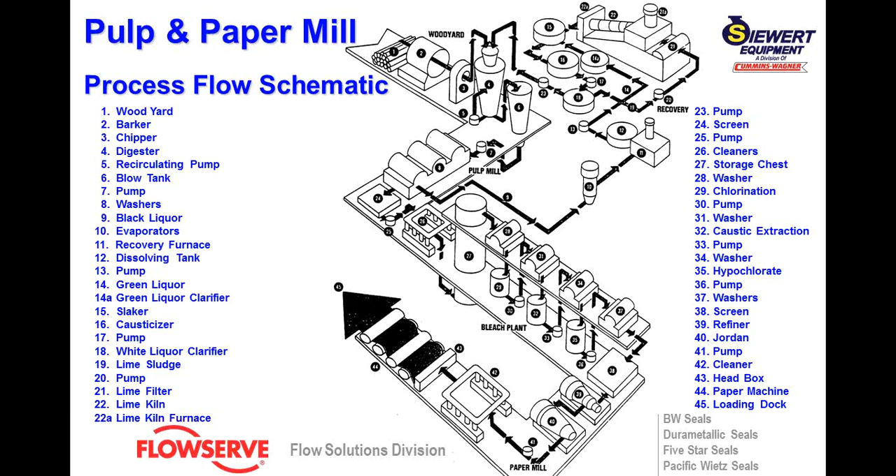Now, system overview, we're going to talk about the fiber sources. Fibers which can be used in the paper making process: wood fibers from trees, recycled bags, rags, vegetable fibers, mineral fibers, and even synthetic fibers.

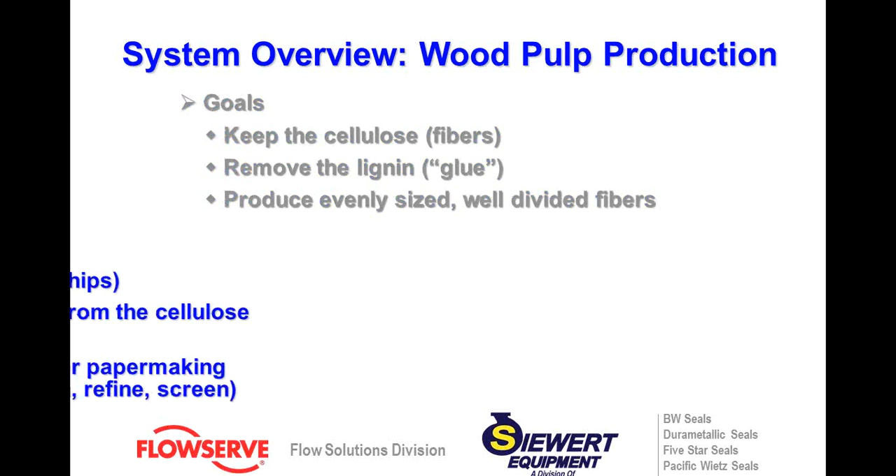The goals of a wood pulp production facility: one, we want to keep the cellulose fibers; we want to remove the lignins; and we want to produce evenly sized, well-divided fibers. There are three basic steps: we need to prepare the wood, separate the lignins from the cellulose, and prepare the fibers for paper making. Wash, clean, bleach, refine, screen.

Now, in this process, again, this is a gross overview of the process itself, but whatever plant you're working at, you want to talk with your process engineers to show you the whole process so you can get a good idea about how everything fits together. We're going to talk about the seals used in your industry specifically.

First, there is the general service seals. This is the ISC II standard pusher seal. These are standard, made to specific ANSI standards, so that they're readily available. They're stocked, they're generic sizes, and turnaround times are very, very quick for these types of seals.

You can see a single pusher seal in the top left-hand corner, and just below it is a dual version of the ISC II. Both are used in the pulp and paper industry. There are quite a few applications that can set up - there's tarring, and especially with some of the black liquor products, you need to have dual seals to be able to keep the stuff from setting up around the seal. We'll go into that further with the different processes. But this is the standard general mechanical seal that's used in most general applications, and especially your ANSI pumps.

The BX bellows seals. Now, the BX seals are used where you have places where you'd have polymerizing or crystallizing types of processes, things that would harden and set up around or hang up a dynamic O-ring. From some of the previous webinars that I've hosted, I've talked about the different seal designs like pusher seals and bellows seals. Well, the pusher seal, if you recall, has a dynamic O-ring which can hang up. The bellows seals do not. The bellows doesn't allow - since you have a bellows, there's no contacting surface to the actual sleeve or shaft of your pump, so nothing can hang up.

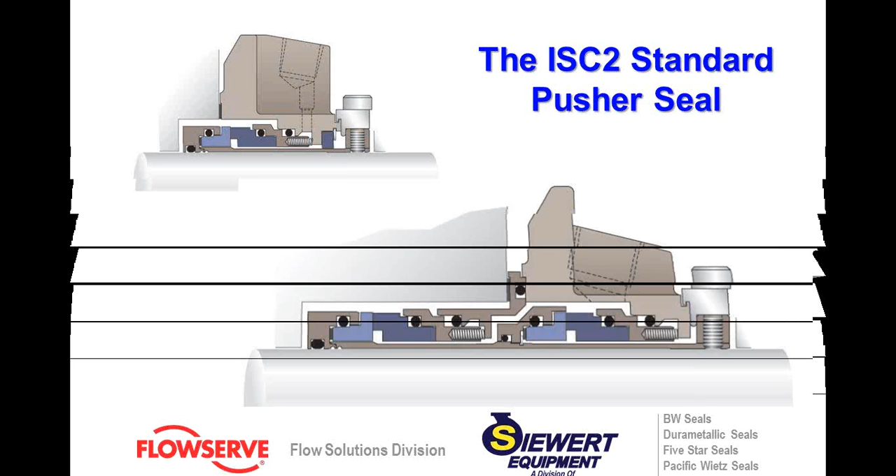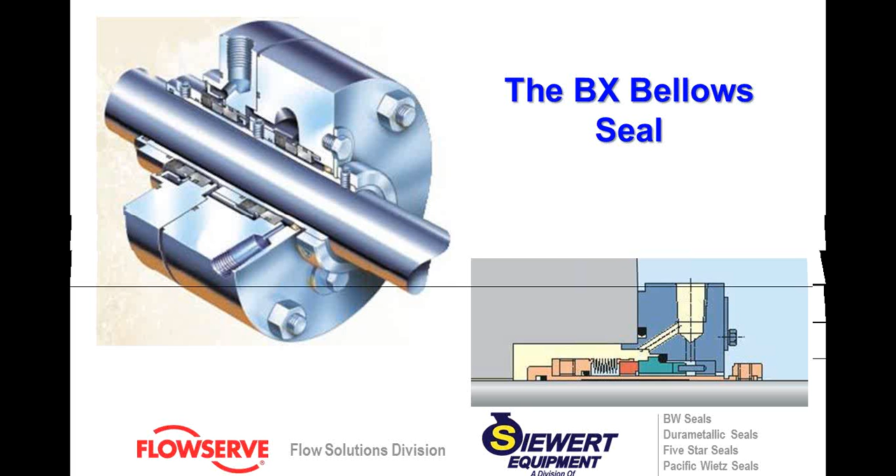Other types of seals here are the SLM and the SLC. Now, these are slurry style seals, and if you can see from the different cutaways in front of you, you'll notice in the top left - and I think you can see my cursor on this seal itself - if you'll notice the green, that's the stationary face, and the red, that's the rotating face. You'll notice how they're what they call end facing. That means that where those two seals meet, it's at the farthest most point, and there's no recessed step in the seal faces themselves. Some of them will have a wear nose.

This does not. The reason there's no wear nose is because in slurries, you want to be able to expel debris and solids away from the seal faces, and that's why the seal is set up the way it is. It's set up end facing and outer rotation, so that everything that can come in contact with the seal faces is thrown away.

And that's basically the big factor with a slurry style seal. Other factors you can see, the springs are actually outboard, designed very similar to the ISC2. The ISC2 utilizes this design. It's a very successful design for keeping springs out of dirty surfaces. It's also very robust. Your slurry seals are generally thicker, heavier material, very durable seals. Thick O-ring grooves, thick O-rings. They're meant to be abused.

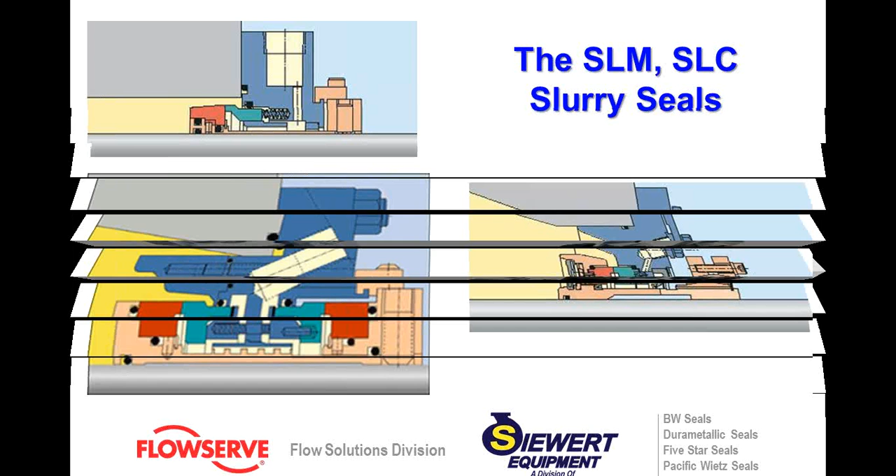The MSS is a mixer seal, a split seal. Not quite as unitized as the split seal, but again, in big large vessels, it's going to be rather time consuming to disassemble and put a seal on, or when you want to get away from the leakages of packing and gain the added efficiency of a mechanical seal, they make the MSS split seal.

In your boiler house, in the steam generation center, you'll have a lot of boiler feed applications. Some facilities have very small boiler feed pumps, some of them have rather large boiler feed pumps. Some of the better designed mechanical seals here that Flowserve developed was called the QBU seal and the D Seal. The D Seal has been around for years. The D Seal is a single spring, very, very wide mechanical seal. The mechanical seal faces are very wide. It is a very, very tough, long-running, high-heat mechanical seal designed for boiler feed applications. It can take a lot of abuse.

Now we're going to talk about the sealing applications, where all those mechanical seals that I just talked about, we're going to show you where these seals fit into your process.

Okay, sealing black liquor. Weak to medium black liquor, that's 12 to 50% concentrate. We prefer dual seals with pressurized barrier systems, so the 53s, or even a 54, to prevent the liquor from setting up between the inboard faces.

Again, this is what I was talking about with some of the bellows designs. If you're running single seals in situations like this and the black liquor sets up, when you go to restart the pump, the faces are stuck together, components are frozen up, and you won't have a seal for very long. The ISC2 or double BX seals are preferred in these types of applications. You want to make sure you're using an AFLAS type O-ring or an EPR O-ring for your gaskets and elastomers. Vitons and Buna and any types of caustic services do not work well.

So you want to remember, in the pulp and paper industry, a lot of the defaults here are AFLAS and EPR. There are other generic names for these types of O-rings, but EPDM is another variation of the EPR O-ring.

Single seals with hard faces and steam quenches have been used. So basically, like a bellows, single bellows seal, especially if it's a small envelope where the pump can actually fit it inside. You can run a bellows seal with a steam quench. You have plenty of steam available in a pulp plant.

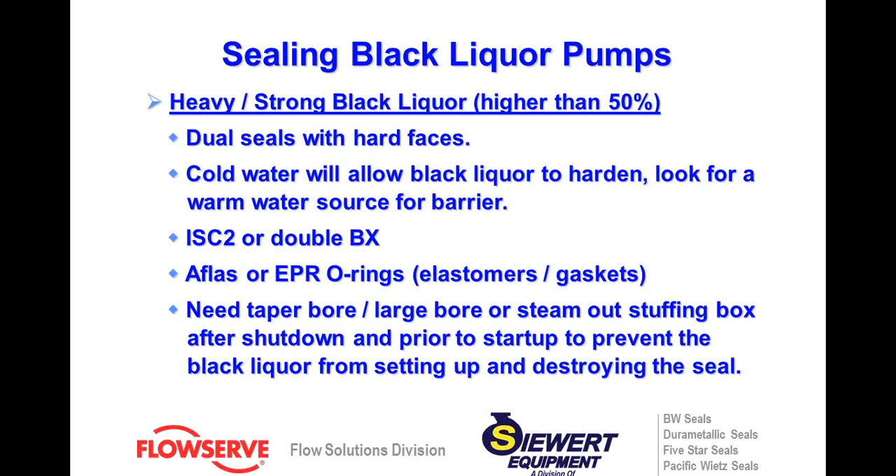Pressurized water barrier is typical. Single cartridge BX seals have been used with external seal flushes on this. This stuff can get very abrasive, and that's where slurry seals come in - the SLM and SLC seals we talked about, with very robust end-facing mechanical seal designs. They've worked very well in these types of applications.

Sealing white liquor: lime is added to the green liquor to form white liquor. Prior to the clarifier, the white liquor is very abrasive, requiring hard faces on dual seals, or the use of a single seal with a throat bushing and external flush into the stuffing boxes. That requires a water source to keep the mechanical seal flushed with a Plan 32. You're bringing water into your process, so that's something you have to manage.

Abrasives are very hard on mechanical seals. Certain types will hold up in certain fashions. With typical mechanical seals that have standard configurations - some of the lower-end seals with springs on the rotating sleeve inside the process - when dealing with abrasives, dirt and particulates build up inside the springs and eventually plug it off and hang up. Other lower quality seals, if the metallurgy or metal quality isn't great, the abrasives will literally eat the seal apart, and within a short period of time you'll have a failure, pull it out, and it's completely shot and wasted.

The most unique case I saw had abrasives that were quartz in a flour consistency, less than 5 microns fine - like a powder mixed in with a viscous fluid. Even in a Plan 13 configuration, flushing from the mechanical seal back to the suction process, which generally helps with dirty services, it would still erode the seal gland in about 6 months, at shaft speeds of around 3,600 RPM. Very interesting to see, but remember bellows are thin and can erode away.

This is where the SLM really can shine, and these seals take it. The SLM, for instance, can handle abrasives up into the 40% range, I believe as an upper limit, and it will work just fine. SLM seals and slurry seals work with any type of heavy abrasive surface - this is when you want to start looking at them. They're heavier and don't fit in every configuration; they were designed specifically for slurry-style pumps.

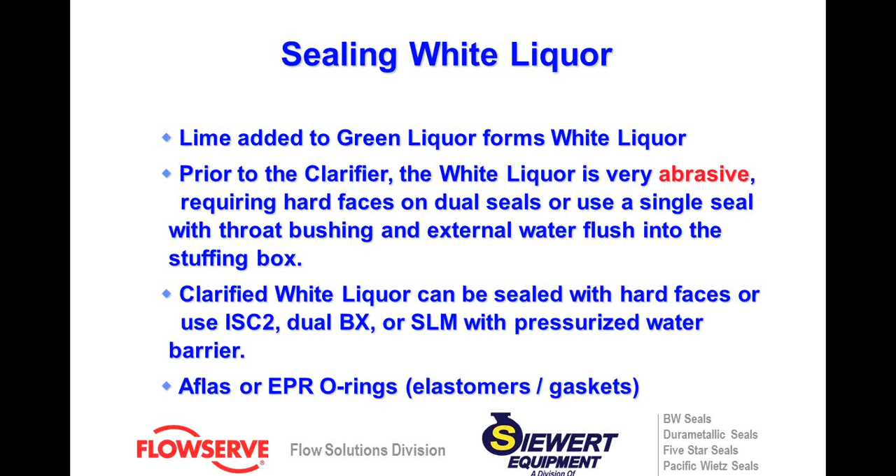Once again, your elastomers are AFLAS and EPR. Now, the bleach plant. As you know, your bleaches are chlorine, chlorine dioxide, sodium hypochlorite. If you look at any metallurgical chart for these applications,

basically there are two things that can be used on these surfaces, and that's titanium or Hastelloy. I don't even think Monel or duplex stainless steels will pass muster. I'm almost positive that stainless steel won't pass muster in chlorine service because the chlorine directly attacks it. So with the wetted parts, you're looking at fairly expensive mechanical seals. You want to make sure you've got everything right, and that there's nothing wrong in the material selection when buying a mechanical seal. You want silicon carbide versus silicon carbide inboard faces—a hard face combination.

You also want to make sure you're using dual seals in these types of applications. But again, because the chlorine, once it gets to the outside, it kind of salts up and leaves a residue, so you have to manage that as well. And it's caustic—if it gets on anything, you don't want anybody to breathe it.

It can make someone sick. Again, on the elastomers, you're pretty much limited to the Kalrez family or Chemraz—Kalrez is a DuPont product and Chemraz is a Greene Tweed product. These elastomers are basically competitive brands, and they make an O-ring that can pretty much take any type of chemical environment you throw at it and withstand it.

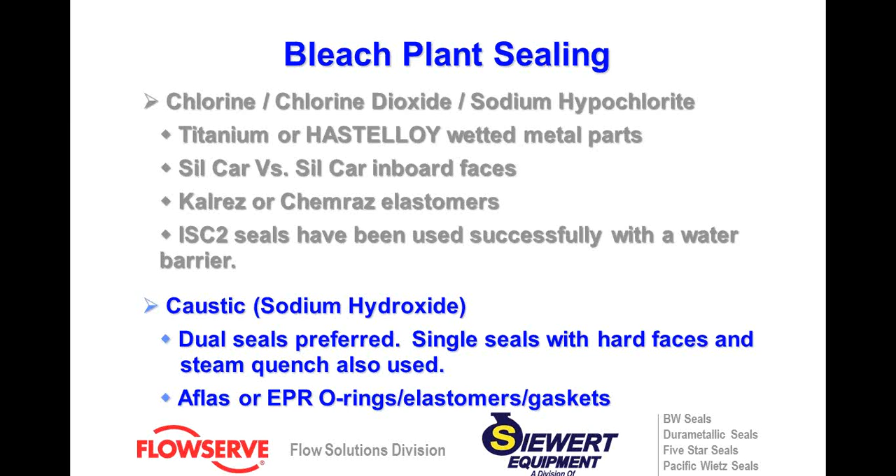Okay, sealing additives and agents. These coatings and filler pigments can be abrasive, so you want to make sure you're using slurry seals—like I was talking about, the SLC and the SLM.

Starches, resins, and dyes—dual seals with a pressurized water barrier are preferred. Sizing agents and other additives, depending on the chemical, typically also use dual seals with pressurized water barrier systems.

In some of these applications you may not see these seals used—you may actually be using packing in certain, more abrasive areas instead. What we're suggesting is that if you want the most reliable, robust system, we'd recommend these dual seals—that's where we're coming from. We want to increase your reliability and avoid downtime. Unlike refineries and chemical plants, which have lots of spared equipment, I've found that most pulp and paper plants don't have spared equipment.

And of course, sealing the paper stock, the chest vessels and agitators - again here the MSS, that's the split mechanical seal. The PSS III, which is a split, or the MSS is a split mixer seal. The PSS III is a split mechanical seal. Can be used on both pumps and in certain

mixer arrangements, especially if it's wetted with a side entry. They can also be, again, you want to have small volumes of flush water in the pulp in the paper stock pumps. Of course, with the larger sizes, you could use the PSS III Split Seal if it requires a lot of time to take the pump down and disassemble it to replace the seal.

Again, if time is of the essence, a split seal can be put in fairly quickly, as opposed to disassembling the whole pump and putting a brand new cartridge seal in. If you do have spares, of course, an ISC2 mechanical seal is an excellent choice in some of the more general services, if configured correctly.

Again, you want to make sure you have small amounts of flush water to keep the paper stock away. The paper stock can get - it dries out, it draws water out. So when it dries, it starts to get very abrasive, especially in the stuffing box.

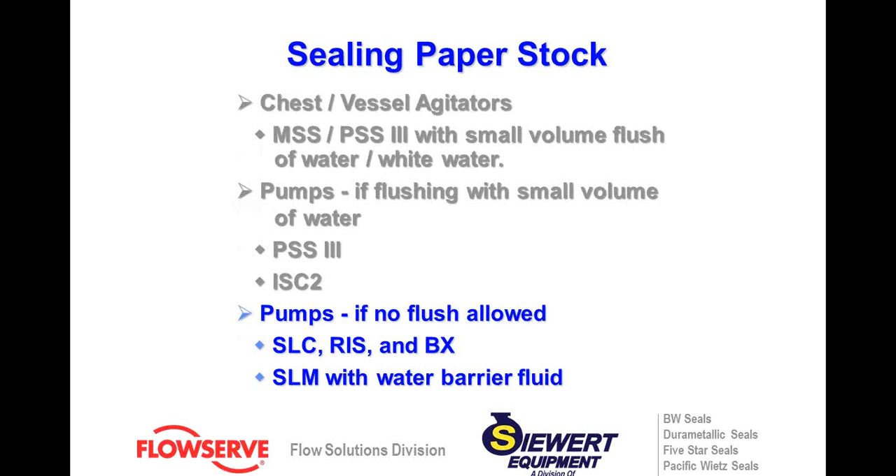I've actually heard of the anomaly of someone saying, nope, I've gotten years out of it and I don't do anything, and it's pushing hot water at this temperature. Now, there might be pressure differentials. The pressure gradient might be good enough in your stuffing box to where you're not flashing. If that's the case, you might actually have enough of a fluid film. Also, if it's running and you're not seeing any leakage, that doesn't mean it's not leaking. Whatever's coming off might actually be off-gassing and steaming itself away. But again, I'd say 90% of the time, if you don't have a properly set up mechanical seal in a hot water service, it's probably not going to last you that long.

Again, the general service pumps, the ANSI pumps, any of this, under 300 psi, under 300 degrees Fahrenheit - these are where your ISC2 seals are used. Just moving stuff all up from here to there, up to maybe 4-inch, even 6-inch line size pumps.

And again, for large applications, big mixers, big vertical pumps, the PSS III Split Seal can come in very handy if downtimes are an issue. It's a good alternative for packing.

Split seals install very quick. The only thing you got to really realize with a split seal is you're putting together two mechanical seals, and the flatnesses - we talked about how flat a mechanical seal is - so when you're bringing these two parts together, you have to pay very close attention. You also have to understand that there may be leakage. You're probably going to see a drip. There's a 50-50 shot that there's a drip afterwards that may be there for the whole duration of the run.

In conclusion, carefully consider the seal, auxiliary features, and flush plans. Those are the things that no matter what you're doing, what you're looking at in your plant. Standard seals are available for most of these services. Heavy-duty seals are available, just like we talked about. They require some engineering review.

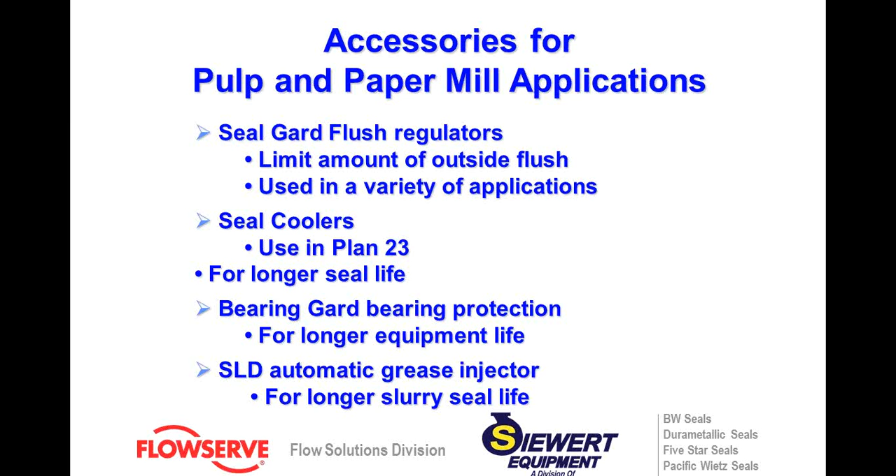Paper stock can dewater and become abrasive in a conventional stuffing box if no flush is provided. Sealing pulp and paper mill applications utilizes the same logic as you would in any other type of industry. So when sealing products, think about what you dealt with in other industries - things that set up, harden, crystallize, and produce slurries. The same logic applies to pulp and paper applications.